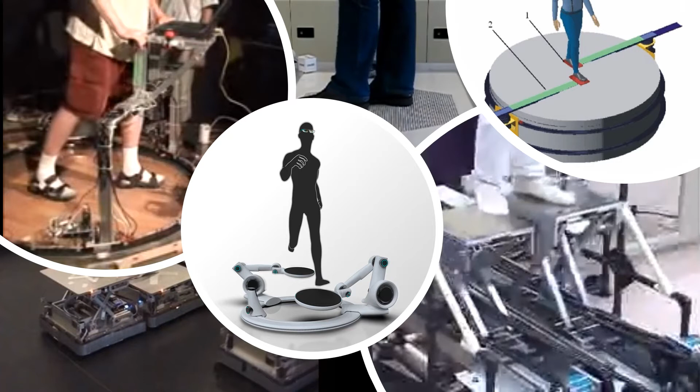Since I saw the movie Ready Player One in August 2018, I wanted to walk in VR like they do in this movie. I was looking for existing treadmills, but got frustrated. None of them allow you to walk like a human. The most impressive one I found is the Infinadeck. It is quite impressive, but I can't afford it. Too expensive. Frustrated, I decided to create my own.

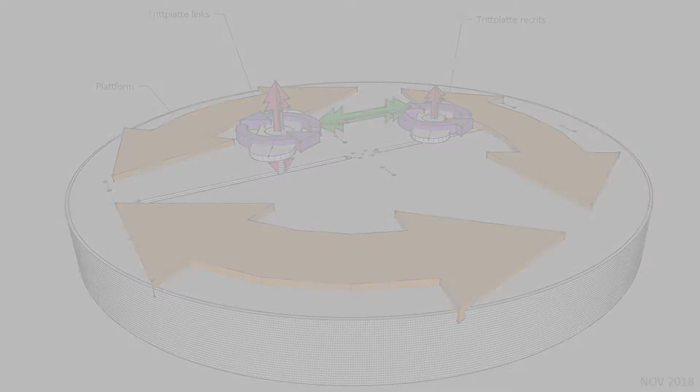This is what I came up with: a rotating base plate as a disc, with 2 foot plates, one for each foot. The foot plates will follow the feet. Can you see the cut in the middle of the base plate? The foot plates will move along this cut and the base plate will rotate.

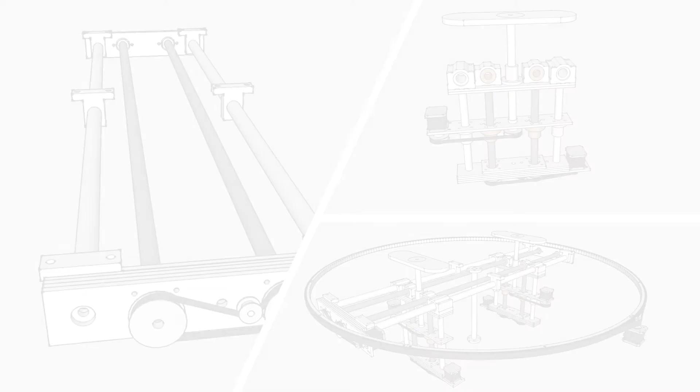I began to draw the basics in 3D. I used Google SketchUp Physics to see it moving. Once this was done, I drew more of the inside part by part. In the beginning it took a lot of time. Finally, in December 2018, I finished the basics and submitted the device to the patent office.

Now it was time to build it. I figured out it was getting very expensive. I did some basic tests, but decided to stop here, because it would become too heavy and too expensive. A smaller, cheaper and lighter version is needed.

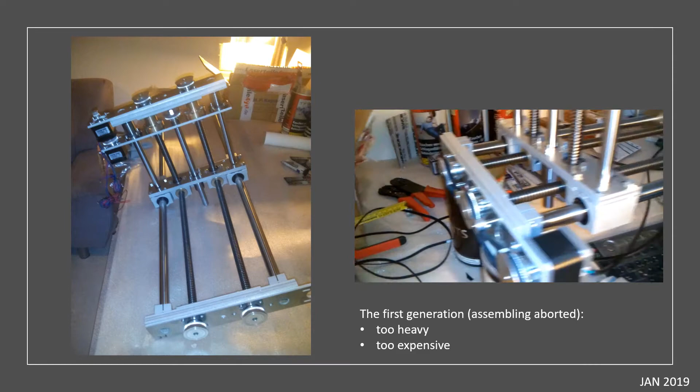It took several months to think about, looking for different motors, cheap mechanical parts, improving the algorithm, looking for cheap electronics, and how the software should look like. The math was getting more detailed over time. I decided to first create a small version of my treadmill, to test the math and the sensors.

The parts arrived, time to assemble it. It took weeks, but made a lot of fun. Finally, I created the software according to my documentation. Some tests were made until I figured out, wow, this might work in real life.

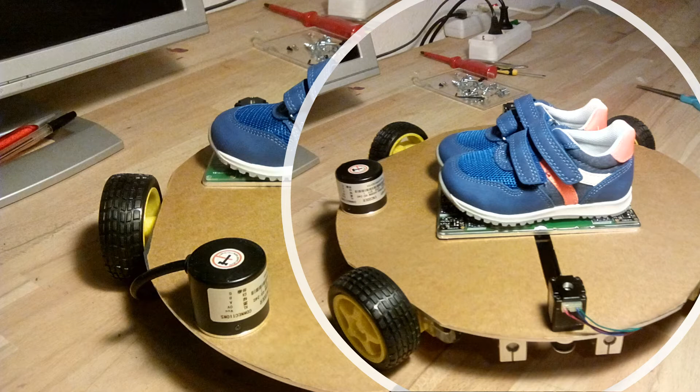The basics were done in small. Now I took several months to think again about how to improve and which components I have to use for the big brother of this one. It took about 1 year to redraw, looking for parts, suppliers, and which material to use.

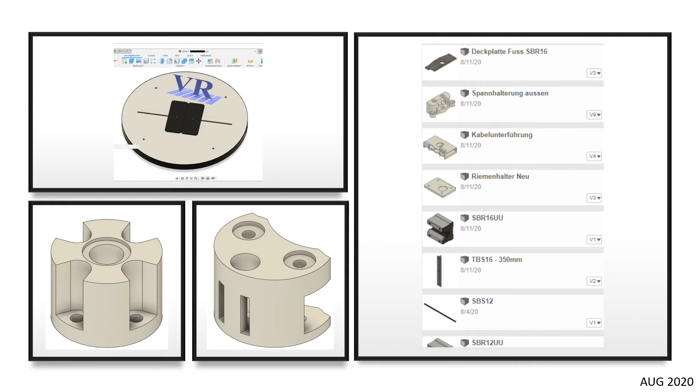Part by part was created and simulated. Meanwhile, there are 299 parts until now. This August, I finally finished most of the stuff. Enough to start building it.

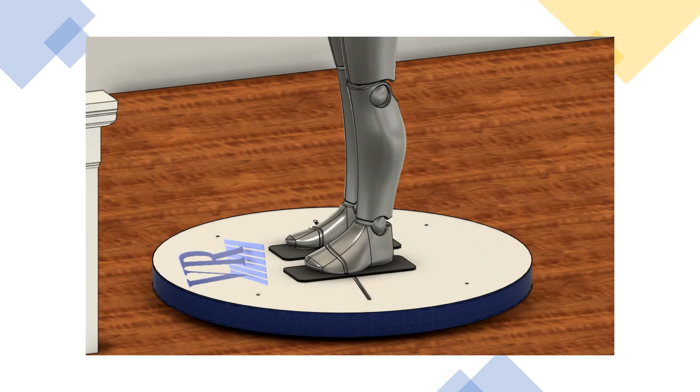This is how my treadmill looks like now. Large enough to walk on, thin enough to store under a bed. This video demonstrates how it will look like while you walk on it. While the person is doing step by step, the base plate will rotate and the foot plates will follow.

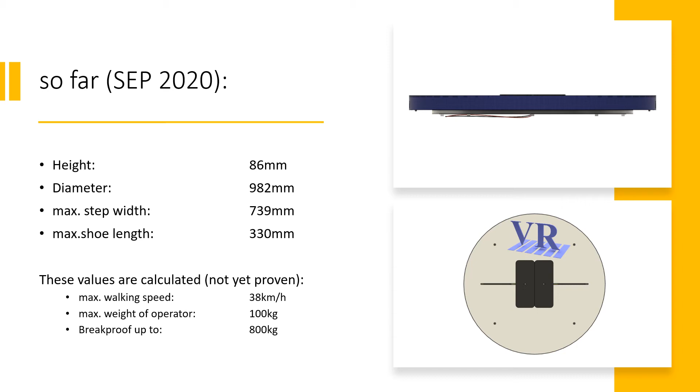So far, September 2020, the basic properties look like this: 86 mm thin, and the diameter is 982 mm. The calculations here are not yet proven. I have to test it later on.

So what's next? Well, I still need some parts. I will order them in the next couple of weeks. All other parts I already have, or are ready to print on my 3D printer. Once all parts arrive, it's time to assemble it. A lot of tests will follow.

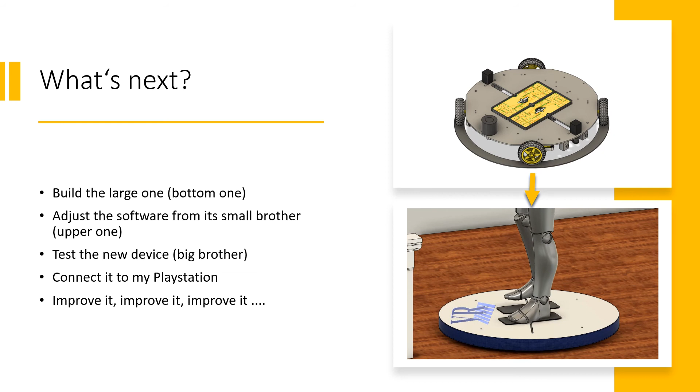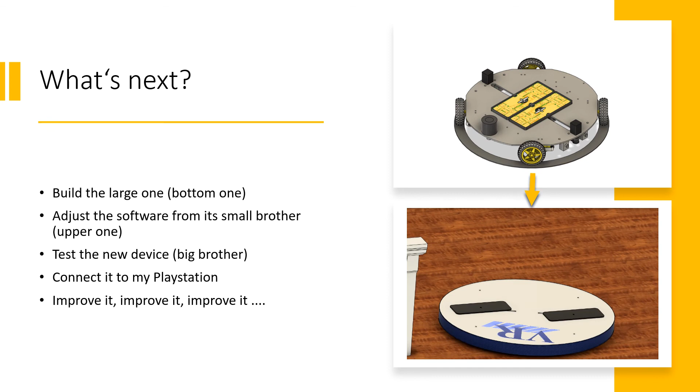Maybe I will figure out it won't work. Maybe I will figure out the walking doesn't feel natural. So far my guess is the walking should feel like normal walking, or at least like walking on an ordinary treadmill. But we will see what happens next. I'm still in a good mood to continue.